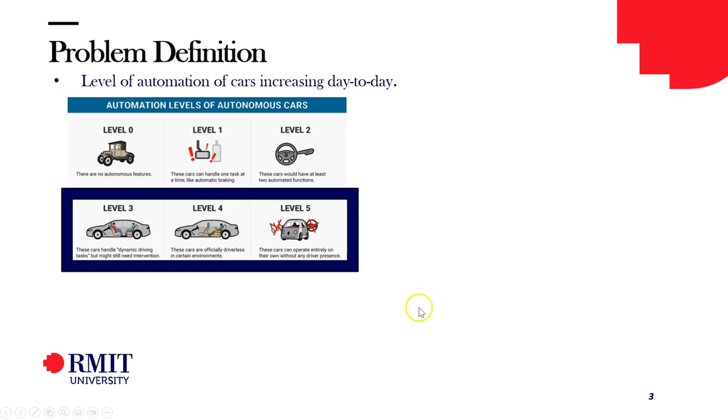Starting with the problem definition, the level of automation of cars is increasing day to day, and this is exactly the point my PhD study addresses. In particular, we're looking at level 4 vehicles where the cars are officially driverless in certain environments.

These self-driving cars of the future have envisaged scenarios where people are seen working on their laptops, mobile phones, maybe allowed to swivel around and talk to other people in the back seat. So basically, this means you will have high levels of non-driving passenger activities.

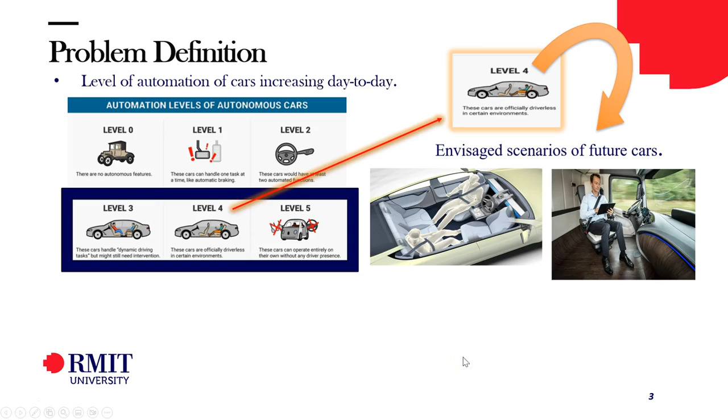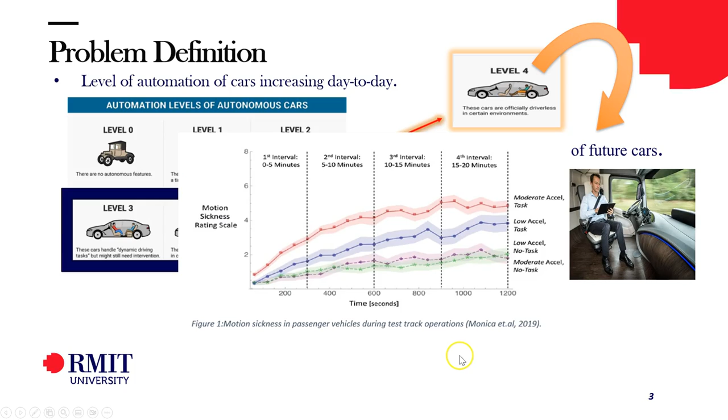Research in 2019 by Monica indicates that higher levels of task engagement in autonomous vehicles will generally increase the amount of motion sickness. So the major problem we come to understand from this study is that motion sickness acts as a barrier to bringing autonomous vehicles into society.

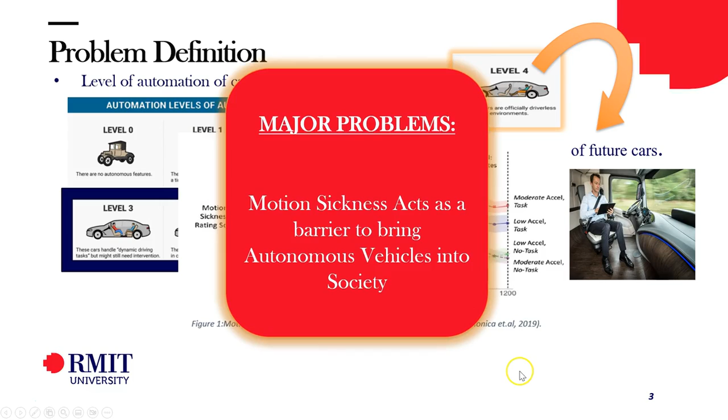Going ahead, I started the literature review, where it was important to understand what motion sickness is. Motion sickness is nothing else but a sensory conflict between the organs of balance, like the vestibular, visual, and proprioceptive systems. When they conflict, they give out symptoms of motion sickness such as imbalance, dizziness, and ultimately vomiting.

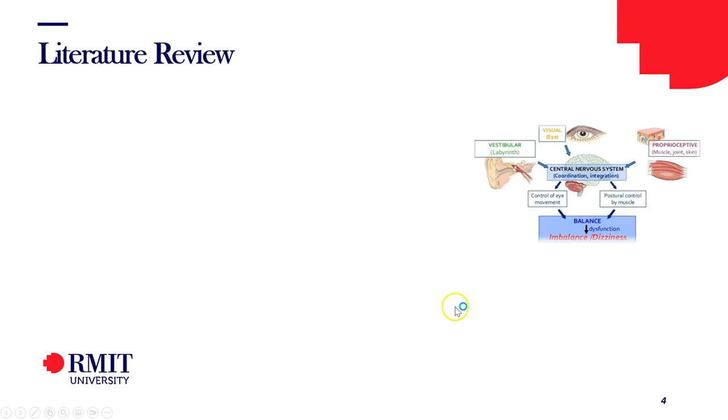To best describe this in land autonomous vehicles, a good example is army soldiers sitting in the back of an army truck, who are basically covered up from all areas so their visual perception is completely obscured. Because of that obscuration, when the truck starts moving around, they have a sensory conflict and are induced to high levels of motion sickness.

On the other hand, the driver who is sitting and driving has all his sensory organs of balance in contact, and he's visibly able to see, so his vestibular system is working fine. His conflict is much smaller compared to the soldier sitting at the back, resulting in very low levels of motion sickness. So passengers sitting at the back are very similar to passengers of an autonomous vehicle.

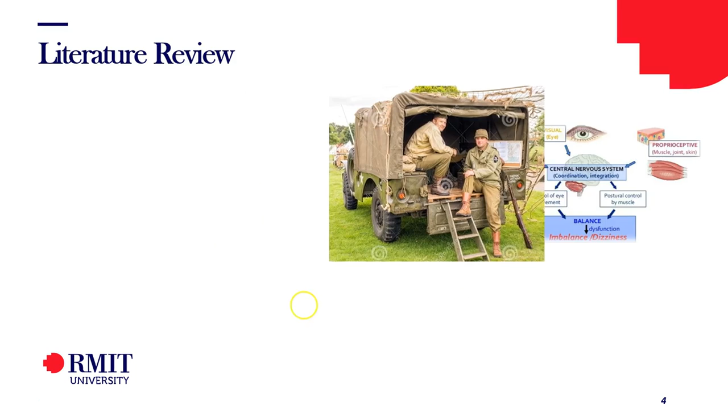From here, we know that if the car does move around, if the vehicle does go on a path of motion, passengers are subject to motion sickness. So it was time to look at what maneuvers are causing this motion sickness.

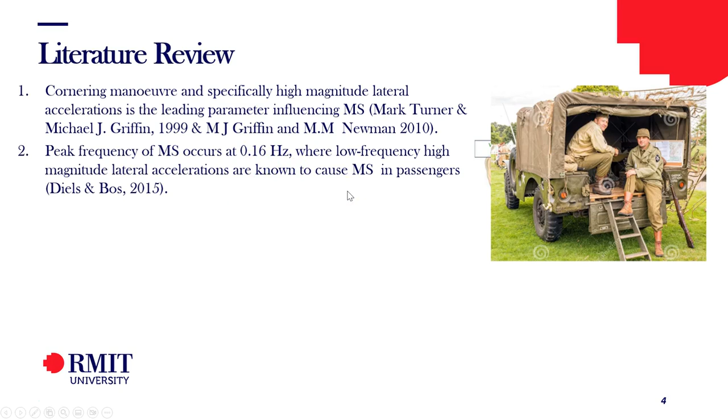One key maneuver was identified by Griffin in his work as the cornering maneuver. In terms of frequency, it was noted that frequencies around 0.16 hertz, generally in the low range of the spectrum between 0.1 and 0.2 hertz, are the most significant in terms of motion sickness.

Going ahead, Jinzhou, in his 2014 paper, was able to find comfort thresholds for the cornering maneuver. He found that 1.8 to 3.6 is best for comfort, and anything beyond this would fall into medium or worse comfort levels.

Other than this, the phase between lateral acceleration and roll was also an important factor. If there is no phase difference between them, this would lead to higher motion sickness in passengers.

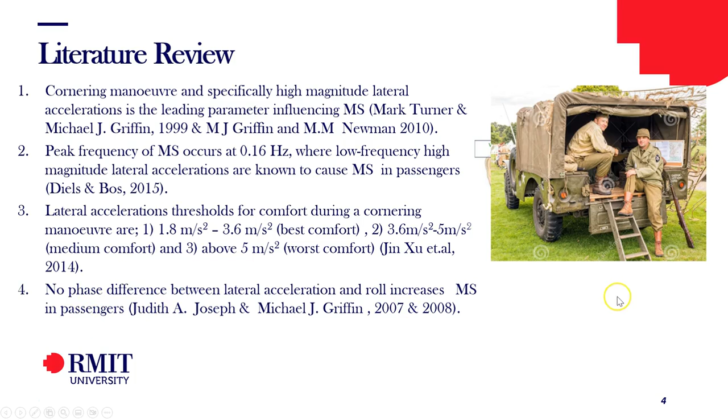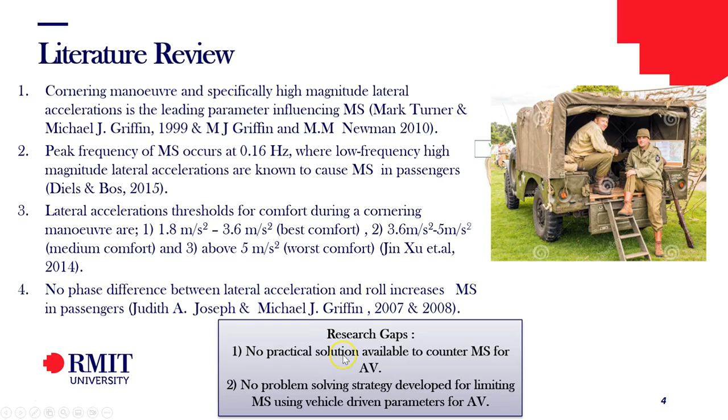Coming to understand this, the research gap was quite simple. There was a lot deliberated in the literature about what causes motion sickness and what factors in land vehicles cause it. However, there was no practical solution or problem-solving strategy.

Based on that, I developed an aim and a strategy. The aim of my research was to limit motion sickness in self-driving cars. In order to limit that, we had to design new paths that would actually limit motion sickness. So the path tracker controller, which we had from our previous work, was used and run on these paths to make sure our vehicle would have the least amount of motion sickness.

The vehicle model would have a lot of different objectives from which we can extract them and put them into a controller such as fuzzy logic, model predictive, and PID controllers, and get a corrective steering angle that would limit motion sickness in this journey.

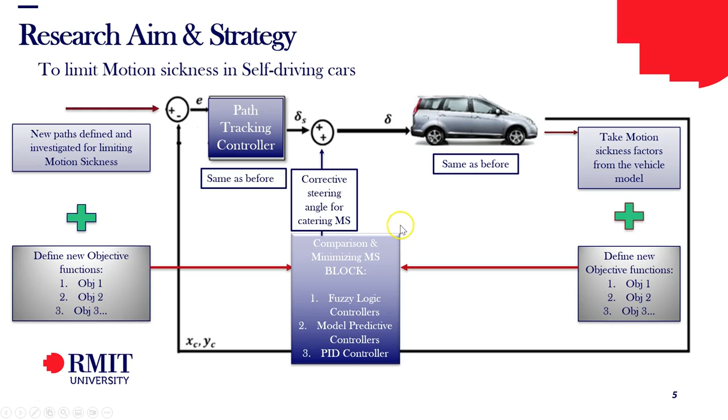In a nutshell, the strategy was very simple: apply path planning of transition curves, and further on, using the objectives coming from the vehicle model, develop a novel cost function to limit motion sickness.

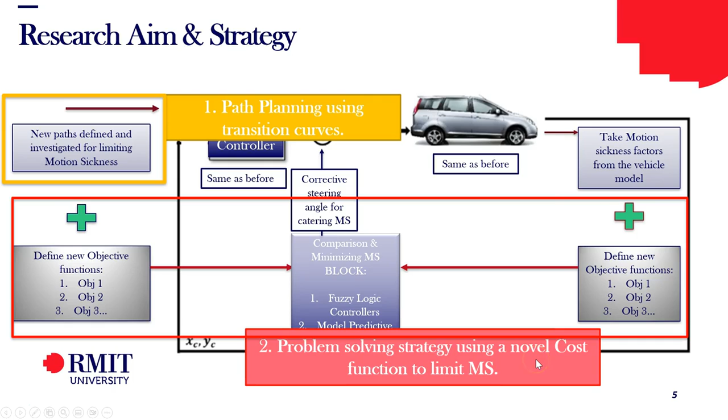Based on this, the research questions were formed. There were five research questions. The first one was: what are the major vehicle dynamic parameters in terms of motion sickness?

Question two was: how do path planning tools such as transition curves influence motion sickness, specifically in self-driving cars?

What is the role of postural instability in causation of motion sickness, and how do route and vehicle dynamic parameters impact the passenger's postural instability?

Question 4: I had to define some major objective functions that would be able to develop a cost function to allow us to measure motion sickness and then accommodate it in real time.

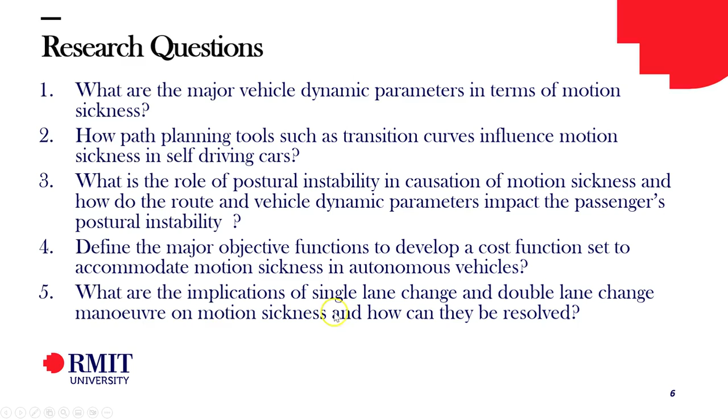And last, what are all the other maneuvers like single lane change and double lane change maneuvers, which also have precipitations of lateral acceleration in them contributing towards motion sickness, and how can they be resolved?

Starting off, I looked at those thresholds to answer research question one. My objective was to identify those thresholds of motion sickness in terms of vehicle dynamics.

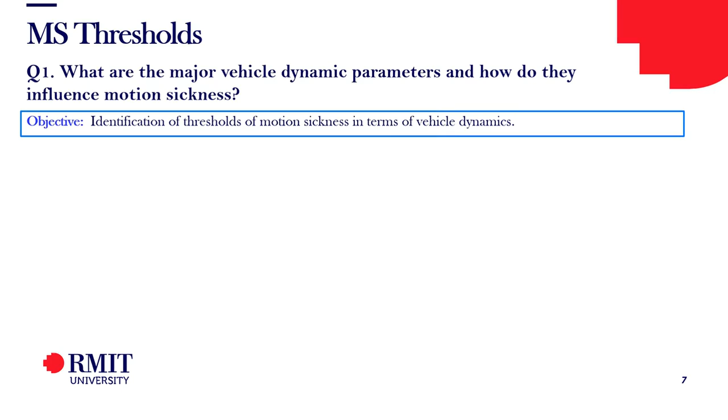The methodology was to identify those thresholds and then design the worst path, so that the worst path would be transgressing all those motion sickness thresholds.

The motion sickness thresholds defined were: in a cornering maneuver, lateral acceleration above 3.6 would cause motion sickness, having consecutive and opposing directions of turns.

The frequency response, between 0.1 and 0.2, specifically at 0.16, should be peaking. Steering inputs will be as abrupt as possible and will cause a lot of problems for handling comfort. The roll and lateral motions should also be in phase.

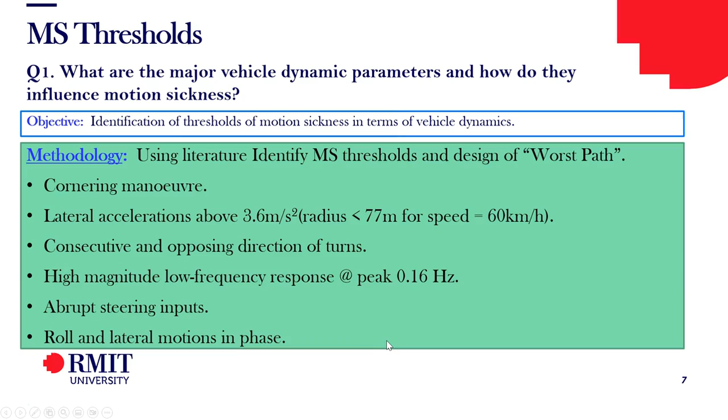Based on that, I went on and designed the worst path. The worst path was made up of multiple consecutive turns, and when passed into our path tracking controller, it was producing abrupt lateral accelerations.

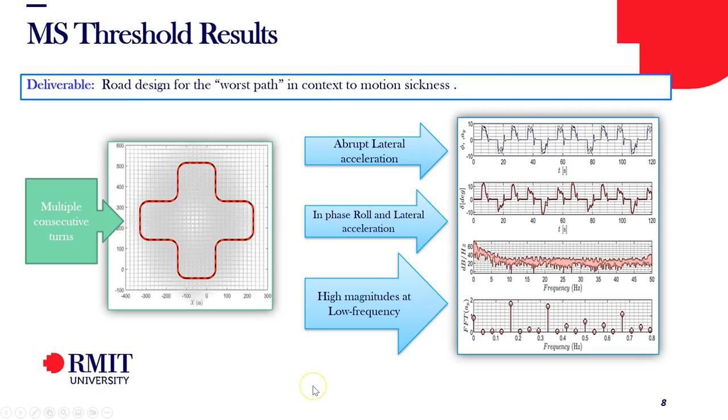It produced roll and lateral accelerations in phase and had very high magnitudes at low frequency, specifically peaking at 0.16 hertz. So it was now time to start the investigation and look at research question 2.

The objective here was, using those thresholds of motion sickness, can we have path planning or ergonomic path planning done on that worst path and investigate whether it will reduce motion sickness?

The methodology used was fairly easy and simple: use different transition curves like Hermite, Bezier, B-spline with configurations of 3-point, 4-point, and 5-point.

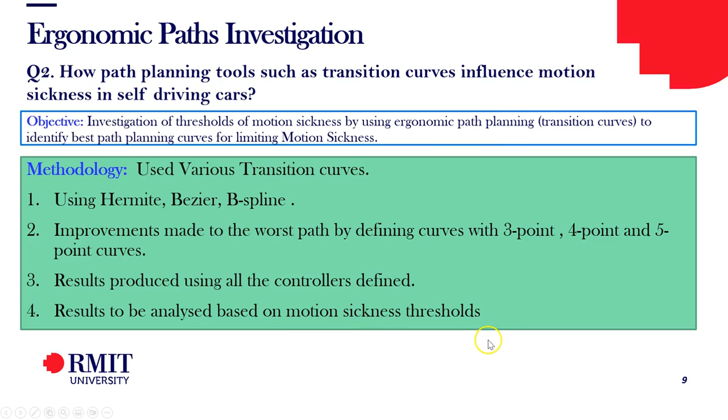Then see, based on our path tracking controller and motion sickness thresholds, if they actually help limit motion sickness. The answer to that question was definitely yes, because the ergonomic paths were able to limit motion sickness, and the best path out of all those transition curves was seen to be the 3-point B-spline curve.

It was not only reducing the lateral accelerations, but also reducing the frequency response, and it did far better than the 4-point and 5-point curve configurations. So in a nutshell, the 3-point B-spline was doing far better.

However, there was one factor, basically the phase between the roll and the lateral acceleration, which was seen to be completely in phase.

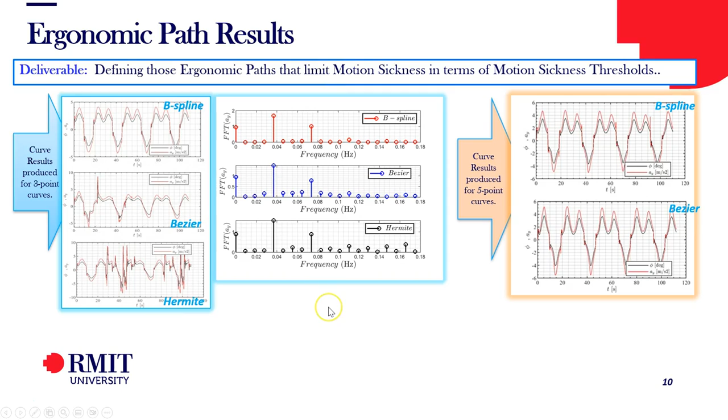In order to investigate this part further, we had to extend our study of the ergonomic path planning, and what we did was go for the quintessential path to further answer research question two.

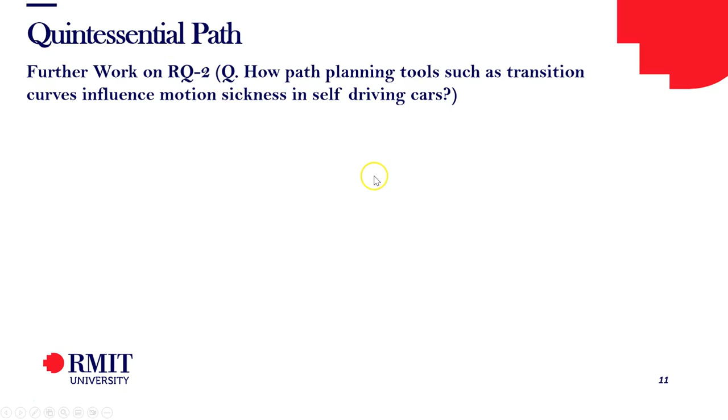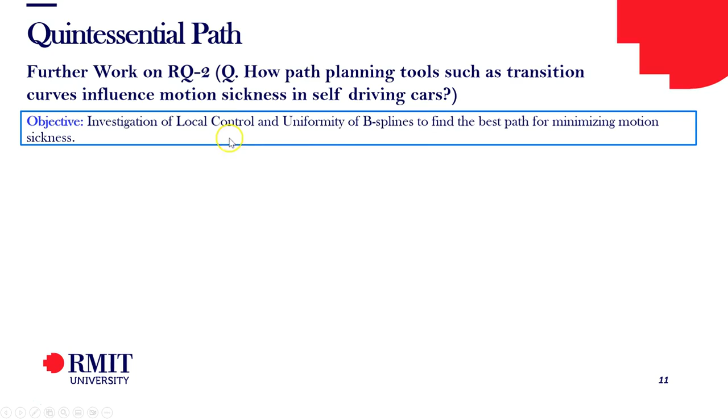In order to have local control uniformity, we had to follow a certain methodology. We already knew that 3-point B-splines were doing very well, but then we wanted non-uniform rational B-spline curves.

These NURBs allow us to do local control, which basically lets you select the midpoint weightage at the midpoint selection, and they also allow us uniformity, letting us design knot vectors in configurations of open, uniform, and non-uniform.

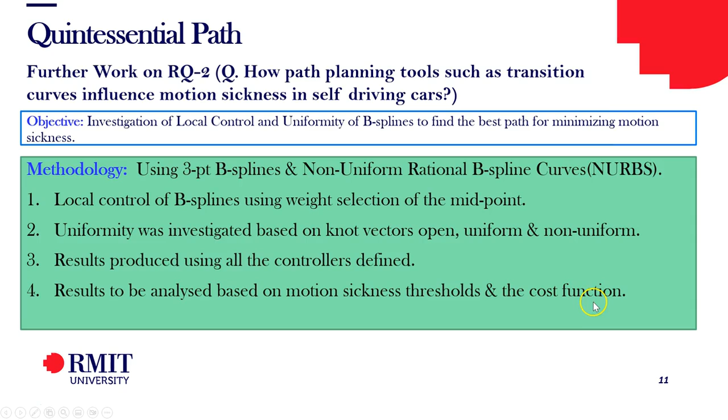We will base our results on the path tracker and then the thresholds and the cost function, which would later be developed as a measuring tool. Looking at this, it was seen that the NURBs would actually be able to provide a slightly better performance.

By selecting the mid-weightage point at 0.75, we could see that the radius was now going beyond 92 meters, and so we were able to keep the lateral acceleration during the turn less than 3.6 meters per second squared. Additionally, the open uniform knot vector configuration 000-111 would by far produce the best result. Based on this, the quintessential path was now formed, which is the 3-point B NURBs.

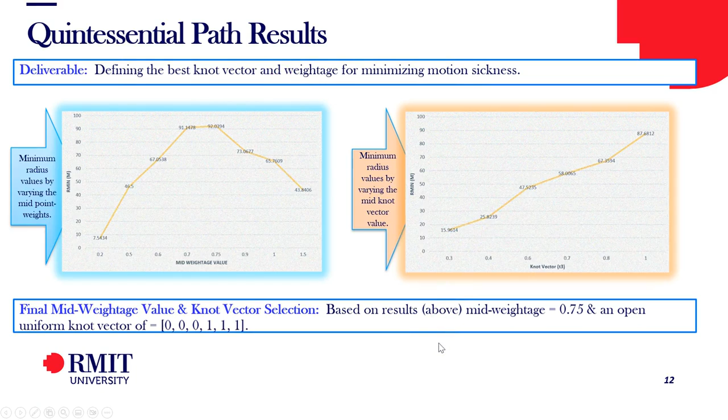Going further, we wanted to investigate research question 3, which was postural instability. In order to understand postural instability's impact on motion sickness, we had to identify the thresholds and design a model to relate it to motion sickness.

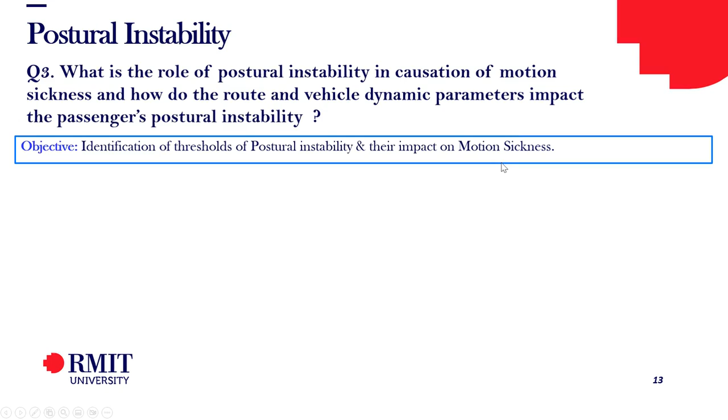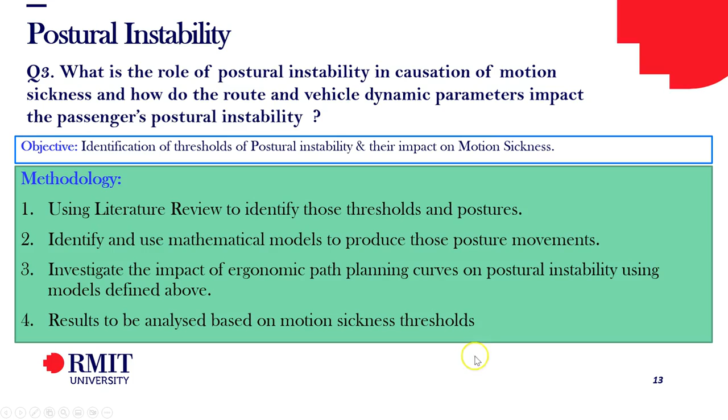The methodology was to do a literature review, find those thresholds, find those postures, find mathematical models that would actually be induced into our simulation, and then see the impact of the ergonomic path planning, basing the results on the motion sickness thresholds. So we were able to design this strategy of motion sickness and postural instability.

The strategy was very simple: we would produce lateral accelerations from the path tracking controller or the vehicle model we had, and input this into the Saruchi neural network model, which she developed in 2020, to produce the passenger's head tilt angle or roll angles.

These angular rates of the head roll or head tilt strategy of the passenger would then be input together with the lateral acceleration of the path to produce motion sickness incidence based on the Kamiji model from 2007, which is based on subjective vertical conflict.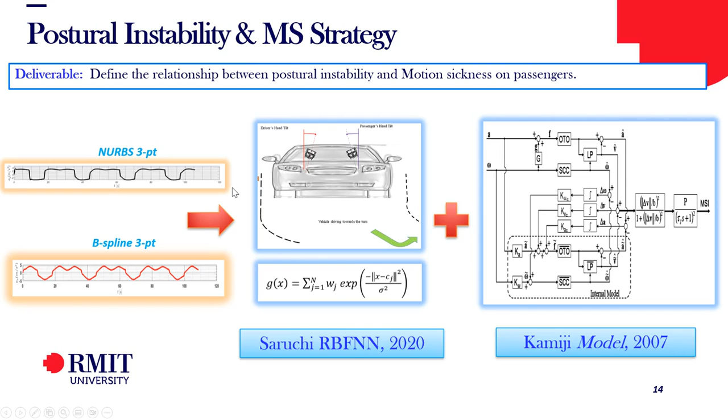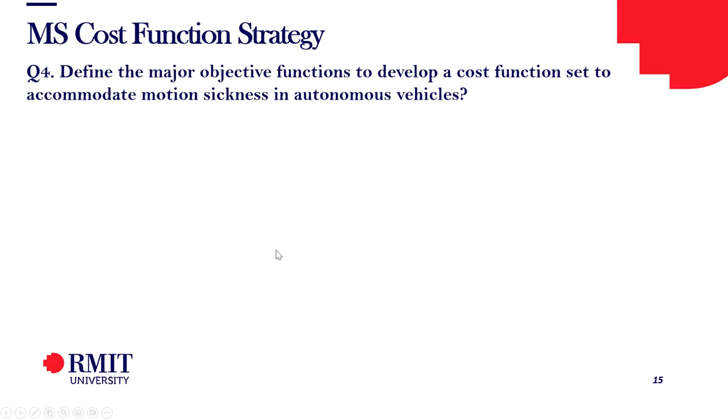Once we had defined postural instability in terms of motion sickness, we had to look at question 4 of our research: to design that cost function, or a measuring tool, in order to measure motion sickness as a scalar quantity.

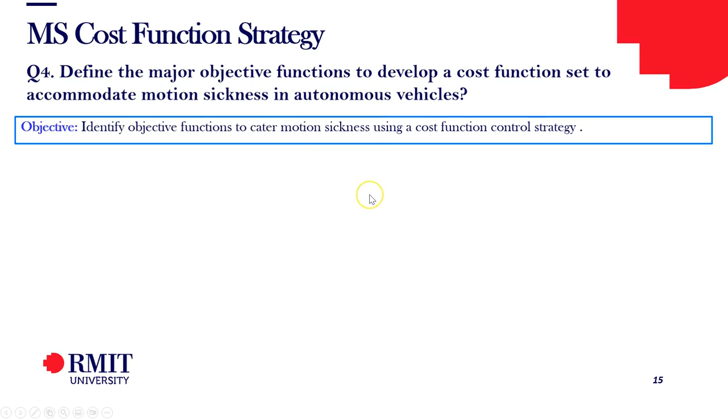For that, we were looking at different objectives and the standards being used in research over the years that actually identify motion sickness as motion sickness.

Going further, we had already worked on designing those thresholds. Research questions 1 and 3 were very important in defining a couple of those motion sickness objectives. We also had to see if that cost function would actually show the real value of our investigation done in research question 2.

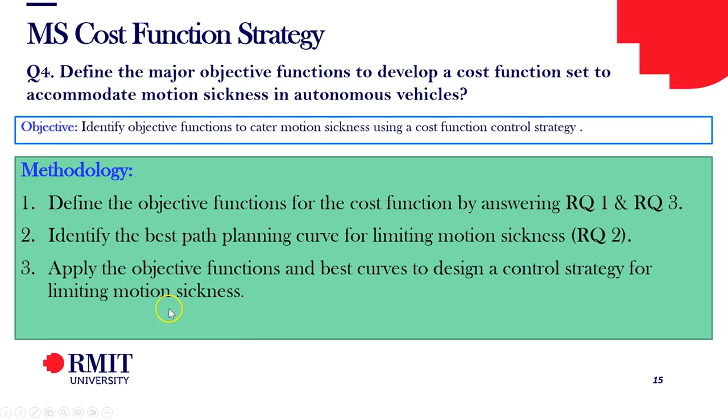We then had to take this cost function tool for motion sickness to find a control strategy based on it. The cost function was formed based on some really good standards used across the literature, specifically for handling comfort, postural stability, and reducing motion sickness.

Objective one was the FFT of the spectrum of the steering angle, and we were taking the RMS value of it in order to reduce or increase the handling comfort.

The other objective was to look at the RMS value of the lateral path tracking error. We want to see how well our path tracker follows the path, because the more closely you follow the path, the less motion sickness will be seen, so that was a very important factor as well.

Objective four is from the previous slide we looked at for postural instability, which is motion sickness incidence. This cost function was then given certain weights, each objective weighted based on multiple regression analysis.

Now we wanted to test our measuring tool, the cost function, measuring it against the NURBS 3-point and the B-spline 3-point curves. We used three different trackers for both curves: model predictive control, slide mode control, and slide mode control modified, and the same for B-spline.

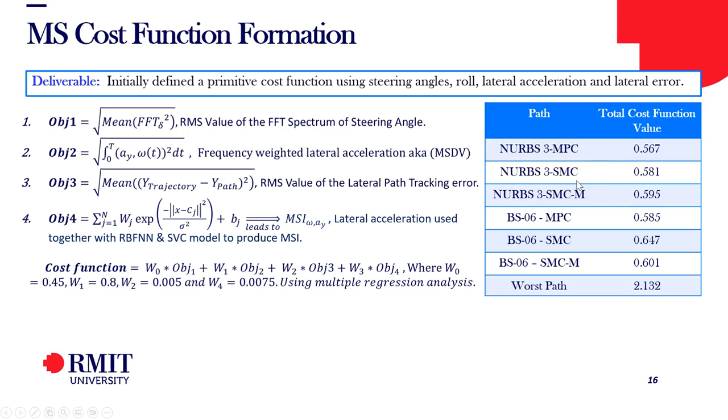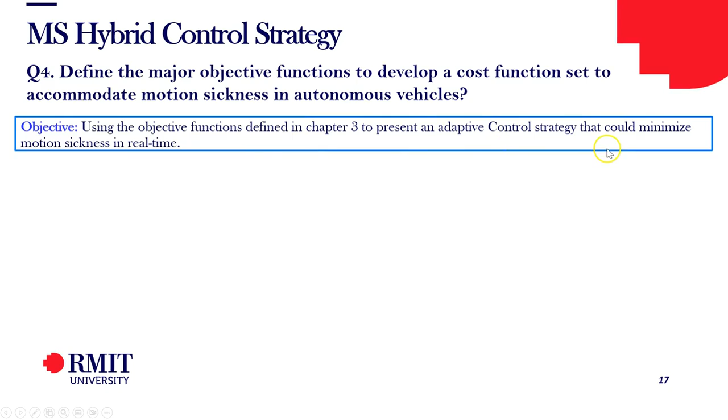It was time to build a control strategy around this particular cost function. The idea was to use those objectives and then define a control strategy that could minimize motion sickness in real time. The methodology was to use those objectives we defined in the cost function, and additionally look at other objectives if we can have extra inputs from them and try to reduce it more. So the idea was to look at lateral jerk, acceptable jerk value, illness rating, and then use this against modern and traditional controllers like model predictive controller, fuzzy logic, and PID.

We were not trying to make a standalone control strategy. We were trying to make a hybrid control strategy, using the slide mode controller as the path tracking controller, our motion sickness cost function and vehicle model, and additionally the NURBS 3-point curve. So this was a hybrid strategy, not just working on its own.

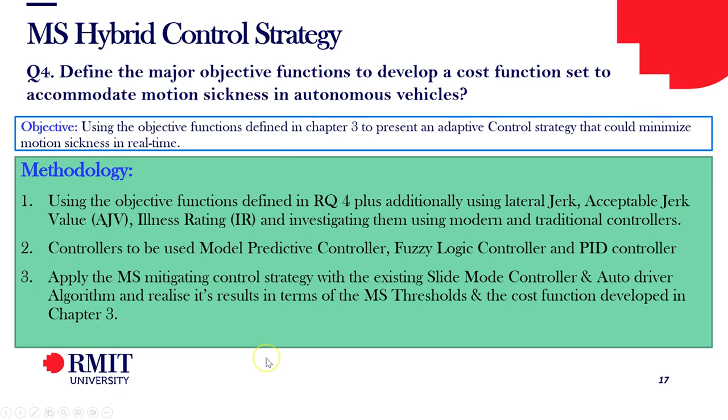Going ahead, when we were forming this control strategy, we named it the motion sickness hybrid control strategy, and we had certain results produced based on the PID and MPC. The fuzzy logic unfortunately did not produce conclusive results, so it's not being shown here, but the PID did. The best two objective functions seen in terms of reducing motion sickness for PID were the lateral acceleration and the illness rating, and for the MPC it was the lateral acceleration.

Hence, we then formed one control strategy based on these three objectives, as you can see here, and they were producing, when added all up together, a single corrective steering angle for motion sickness. So how the hybrid system would work: this is the slide mode controller. We would take the lateral acceleration from the vehicle model, and then infuse this negative feedback of the steering angle to the motion sickness, to the slide mode controller, to correct it and make sure it follows the track to its best knowledge.

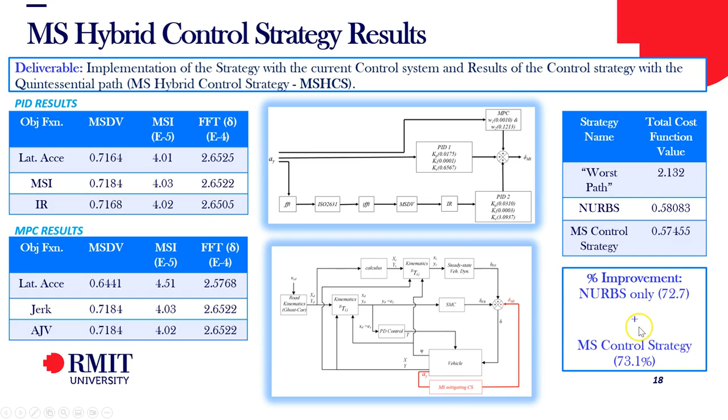When we tested our motion sickness hybrid control strategy compared to the NURBS, we saw a 0.4% improvement. That meant the hybrid control strategy, when cornering, would in real time do slightly better than the NURBS only. Going forward, we had now to look at question number 5.

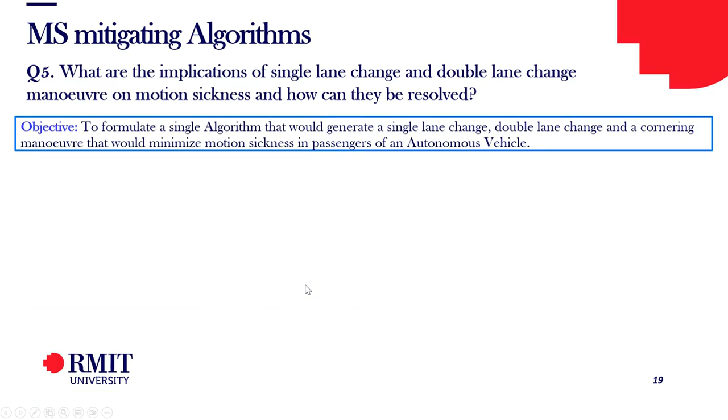We were looking at single lane change and double lane change because we wanted to look at other maneuvers that also produce lateral movement in vehicles, and what better than single lane change and double lane change, since we already had looked at cornering. So the idea here was to formulate a single algorithm that would cater to single lane change, double lane change, and cornering for minimizing motion sickness.

For that, we used a methodology of three phases. Phase one, particle swarm optimization, to take the best coordinates to conduct that maneuver. Phase two, to apply the motion sickness free block, which removes any of those parts that are actually transgressing the motion sickness threshold. Phase three was a simple trigonometric setup that would make the steering angles as comfortable and gentle as possible by making the starting and ending as symmetric as much as possible.

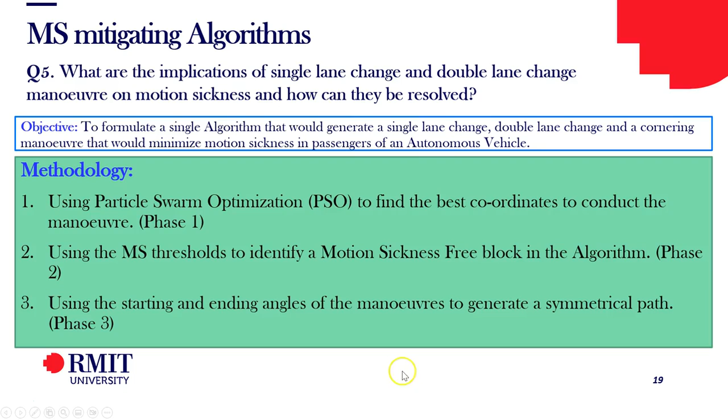Going forward, the motion sickness algorithm results, since it had single lane change, double lane change, and cornering all together in one algorithm, we called it the ultimate motion sickness mitigating algorithm, or UMSA. Comparing the single lane change against the algorithm presented in reference 12, the sine x function, we can see our motion sickness thresholds are reduced abundantly. Even for the double lane change, it can be seen quite visibly that our path for the algorithm is doing much better compared to the x sine function.

Comparatively, if you look at the illness rating, our algorithm's maneuvers like single lane change, double lane change, and cornering all are performing well below the level of illness rating, indicating very little or almost no sickness at all felt by the passenger in these paths.

This signified that I had completely answered all my research questions, and now it was time to validate or verify these findings. That was done using the RC experimental verification.

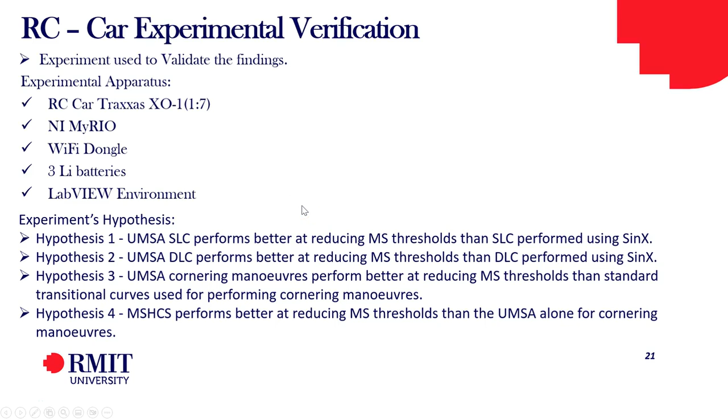This experiment was used to validate the findings of my previous investigation of the ergonomic parts, the motion sickness cost function, and the cornering maneuver strategies and algorithm.

For this experiment we used the RC car, a 1:7 scaled car, with the myRIO, which is a National Instruments device for measuring the vehicle parameters that give us the motion sickness results. Lastly, the LabVIEW environment with a Wi-Fi dongle was used to make the vehicle run autonomously.

On those parts, there were four hypotheses for this experiment. Each one was that the ultimate motion sickness algorithm, in terms of single lane change, double lane change, and cornering maneuver, does better and reduces more motion sickness than the standard sin x functions or standard cornering maneuvers.

The fourth hypothesis was a comparison between our own solution, the hybrid control strategy, which we had seen in the previous slide did slightly better in reducing motion sickness thresholds than the ultimate motion sickness algorithm alone. So we had to work out this experiment to validate our findings.

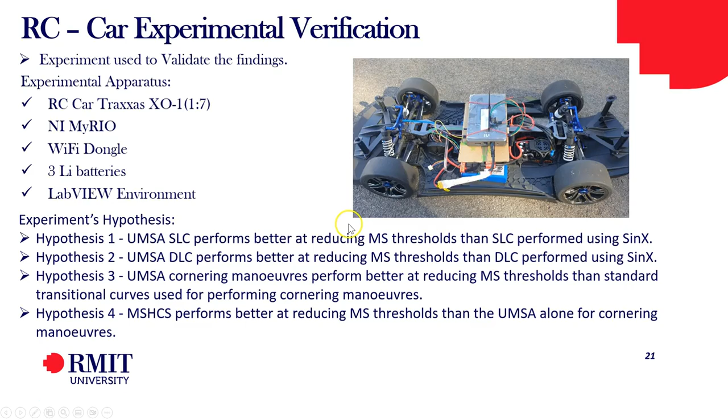Before we could do that, we had to calibrate the vehicle's steering angle using the Ackermann condition, and program the electronic speed controller of the Traxxas, the Castle Mamba Monster Extreme, which had to be unlocked first and then programmed based on the ratios given in the Traxxas manual.

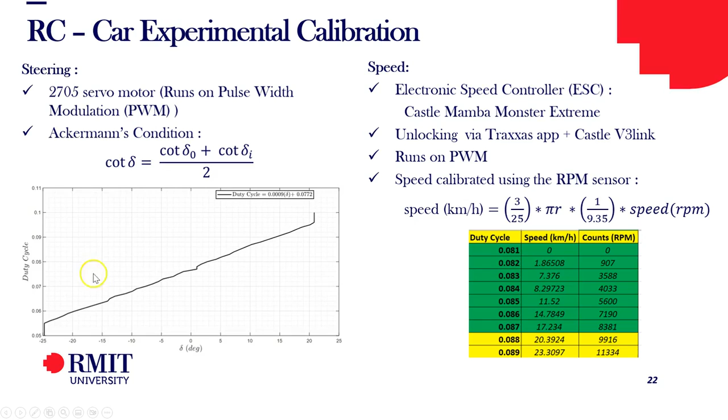Based on the database and these ratios from the manual, we were able to calibrate the speed in terms of duty cycle and also the steering angle. Once this was ready, it was time for the physical parameters test.

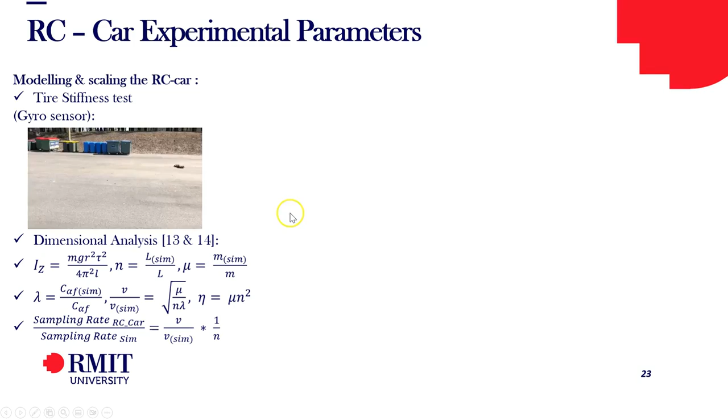Once that was done, in order to generate the steering angles for the parts, we had to make a full-size hypothetical model of this RC car, applying dimensional analysis using the equations shown here.

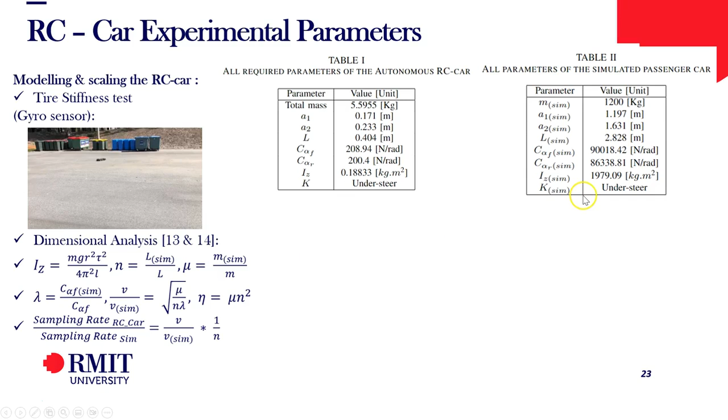Because this was a passenger car, we had to make a small tweak to our RC car and shift its center of mass from the rear axle slightly towards the front axle by adding 800 grams of weight to it.

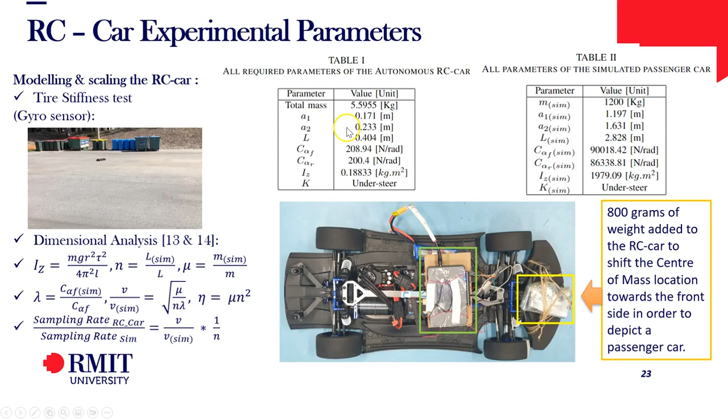Once this was added, the sampling rate was also fixed, and it was seen that the simulation would have a sampling rate two times greater than the RC car. So now we move to trying the experimental results on those parts to validate our hypothesis.

The first thing was to validate the single lane change and double lane change, and then the cornering maneuver. The sampling rate for the RC car was supposed to be half of the simulation, so they were fixed to that limit.

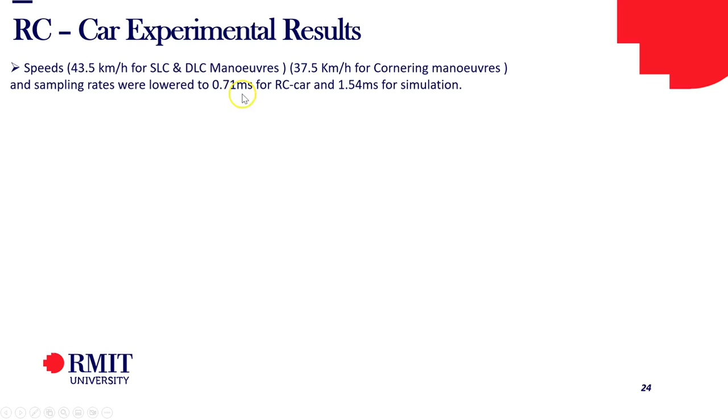If you look closely here, the results of the single lane change can be seen. The solid black line indicates our UMSA single lane change, and the red function is the SinX, which is very high compared to the UMSA.

We also see the SinX double lane change in green, compared to which our UMSA performed much better. In terms of motion sickness thresholds, all of these showed a 50 to 60% reduction, so hypotheses 1 and 2 were definitely proven.

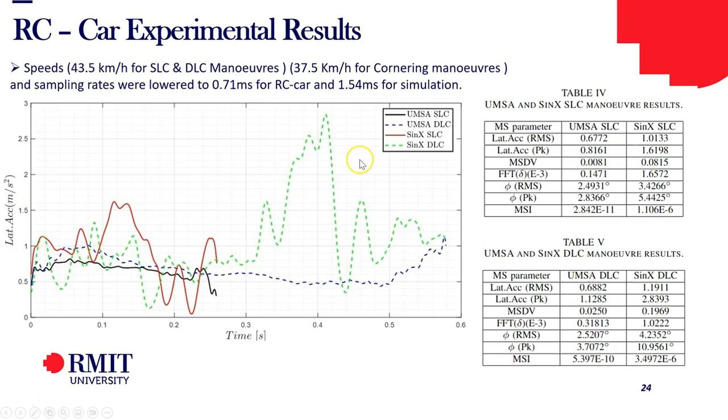Moving to hypothesis 3, we looked at the cornering maneuver and the general turn, which is very abrupt and very high compared to our UMSA, shown as the black line.

Even if you look at the motion sickness thresholds, we were able to achieve a reduction of up to 60 to 80% in those motion sickness thresholds.

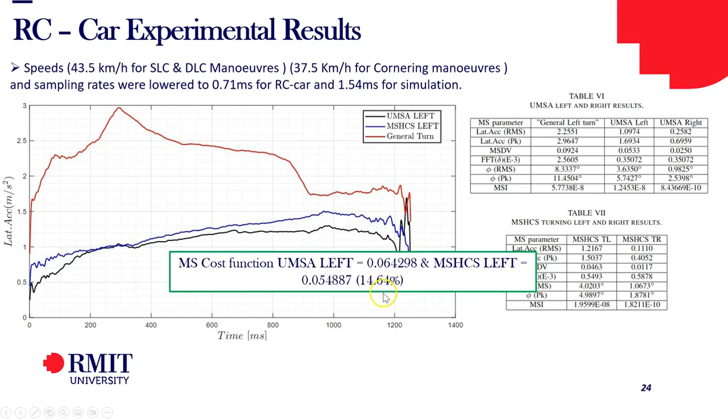Comparing the motion sickness hybrid control strategy with the UMSA, which is the fourth hypothesis, it was a bit more tricky. However, we did the cost function analysis and saw that the motion sickness hybrid control strategy did perform slightly better in terms of cornering against the UMSA, by just 14.64%. In our simulation, we got it equal to 10.9%. So that meant all our 4 hypotheses stated at the beginning of the experiment were definitely proven correct.

Further on, we went to make some accuracy and reliability tests for the RC car experiment. Was the experiment that we conducted reliable and accurate? For that, we tested it at very high speeds, such as 80 kilometers per hour in the simulation, equivalent to 21.33 in the RC car, and the same for the turning left maneuver.

The results can be seen here. This is what we expected. The experiment was sampled at half the rate compared to the simulation, and the motion sickness thresholds were within an accuracy of 82 to 85%, and 98 to 99% in terms of the head roll angles.

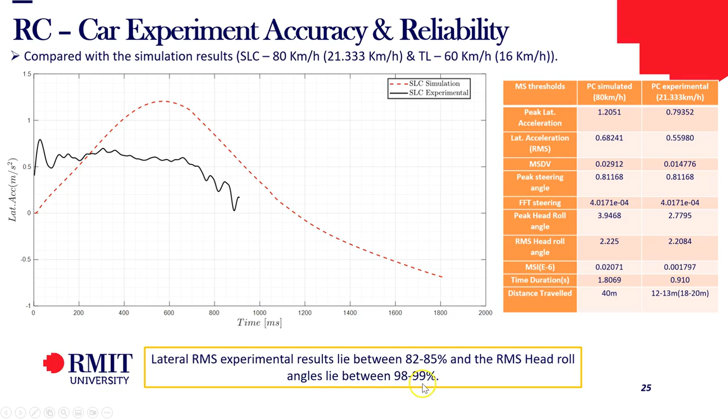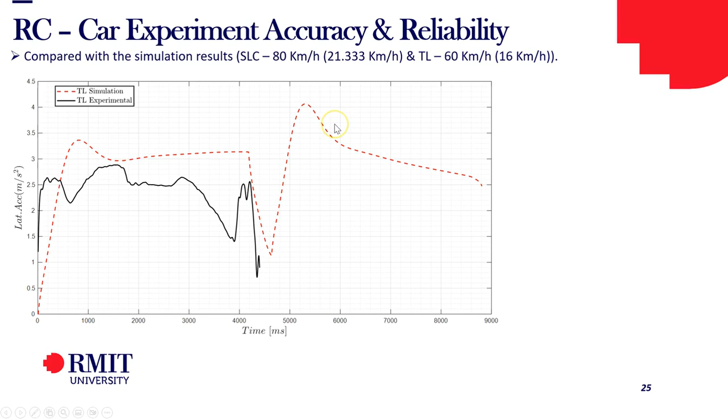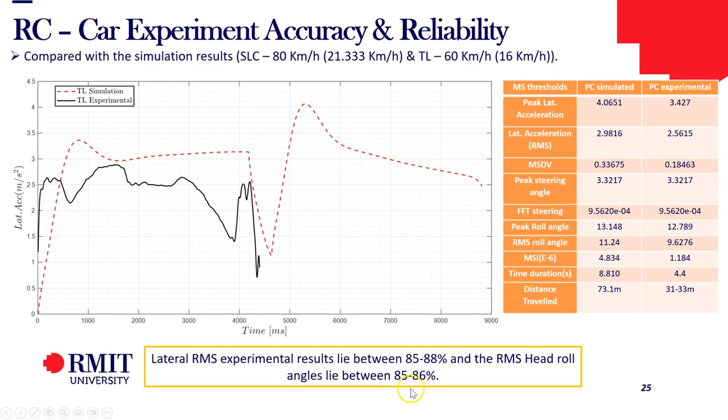For the turning left maneuver, we did the same test and saw the sampling was again half that of the simulation car. This means that the real car would take 9,000 milliseconds, while our RC car would take exactly half that time, 4,500 milliseconds. When we compared the motion sickness threshold, we were 85 to 88% accurate, with RMS head roll angles coming to 85 to 86% accuracy.

We also did some reliability tests by testing the vehicle under wet and dry conditions, with the same maneuver, turning left being the worst case, but at two different speeds to check sensitivity. We saw that the system was very sensitive: in the wet condition we had lower lateral acceleration compared to the dry condition, indicating that our system was not only accurate but also quite reliable.

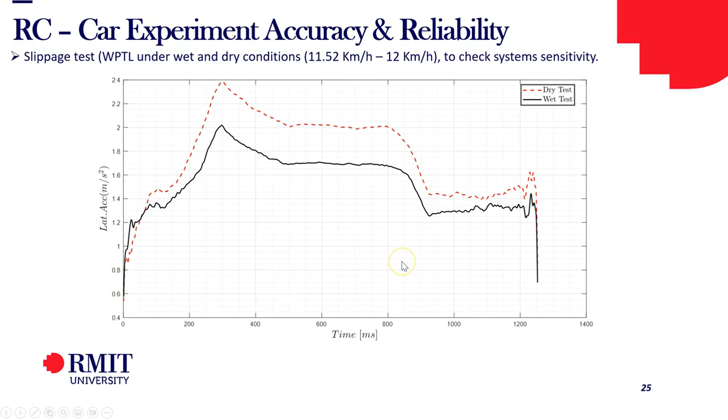Additionally, I'm working on a narrative review paper for Elsevier, which will cover all the discussions you saw here today in one particular paper, a Q1 journal. We also believe there is a lot of scope with this autonomous vehicle being implemented in my research, and we will look for a grant proposal for the Defense Innovation Hub. Obviously, I will be completing my thesis work in the first quarter of year 4.

For conferences, I've attended two, and I will be going to the third one at the end of November. I've already published one book chapter, and I'm publishing the last experimental chapter as a book chapter as well. It's been accepted but will hopefully be published next year.

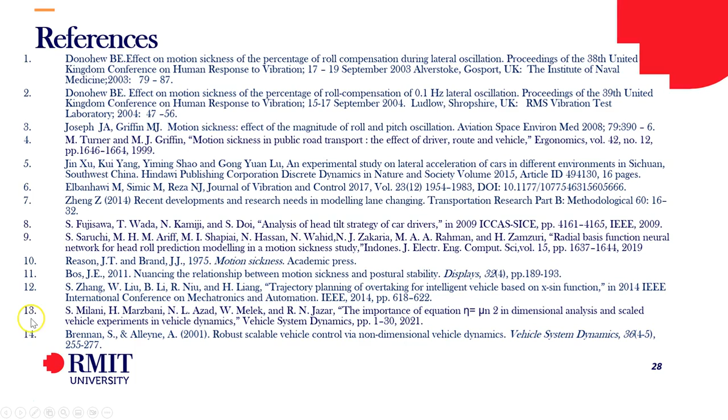So we come to the end of my presentation. That was my journey of 3 years of my PhD in about 30 to 31 minutes. I hope you enjoyed every bit of it, and I hope I explained it well enough that you don't have any remaining questions. But if you do, you're most welcome to ask me.